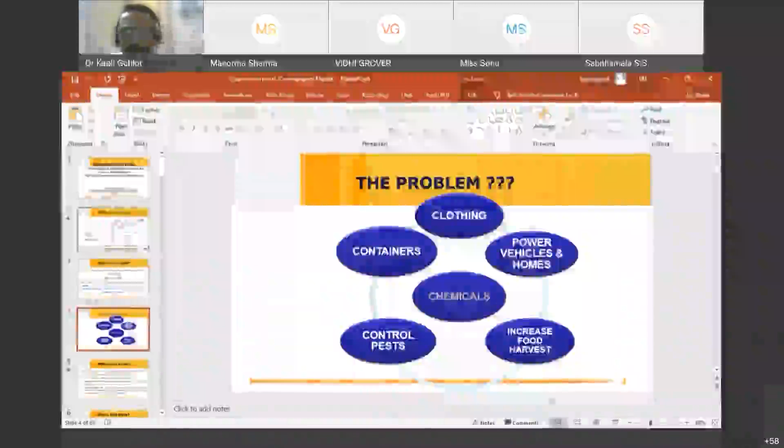Sir, actually, where should I start from? Let me start again. Due to some technical glitch, sir, it first slide. Okay, okay.

So I'll be talking about bioremediation technique for the solid waste management. So first of all, I'm going to define what is the solid waste.

In general, when we define solid waste, solid waste is considered as any unwanted or useless solid material which is generated from human activities in residential, industrial, or commercial areas. So any solid waste generated from these areas can generally be included in the solid waste.

And these wastes, according to their origin, according to their contents, and according to the kind of hazard they impose, can be categorized into three categories. Depending upon the origin, they can be classified as domestic solid waste, industrial solid waste, commercial solid waste, the solid waste generated by construction activity, and institutional solid waste.

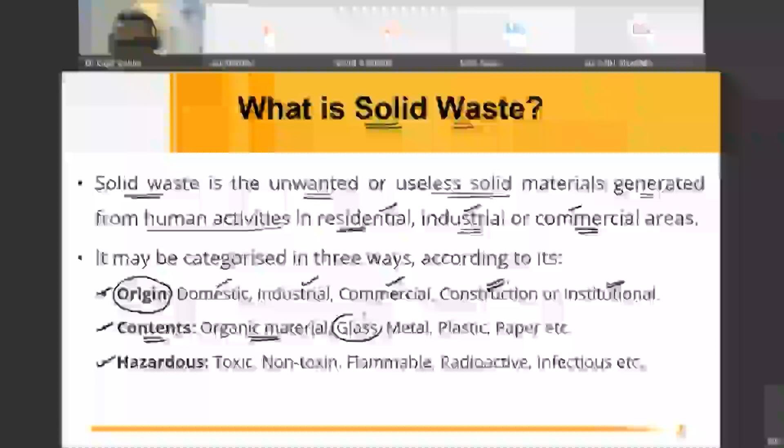Then, depending upon the content, we can classify solid waste into organic materials - the solid waste which contains carbon content and is organic in nature. That is one kind of solid waste. Then there is waste generated by glass, scrap metal, then plastic - this is one of the very important cases because we are dealing with a lot of problems - the waste generated in the form of plastic, and then paper. So depending upon the content present, this is another classification of solid waste.

Then on the basis of the nature of hazard, solid waste can be classified as toxic waste - waste which imposes directly toxic effect on human beings, animals or plants. Then there can be non-toxic solid waste, which does not directly affect living beings. Then we have flammable solid waste, radioactive solid waste, as well as infectious solid waste. So these are the major categories as far as solid waste is concerned.

Now, when we define solid waste scientifically, the first scientific definition was given in 1976 under the Resource Conservation and Recovery Act, RCRA, under section 1004(27).

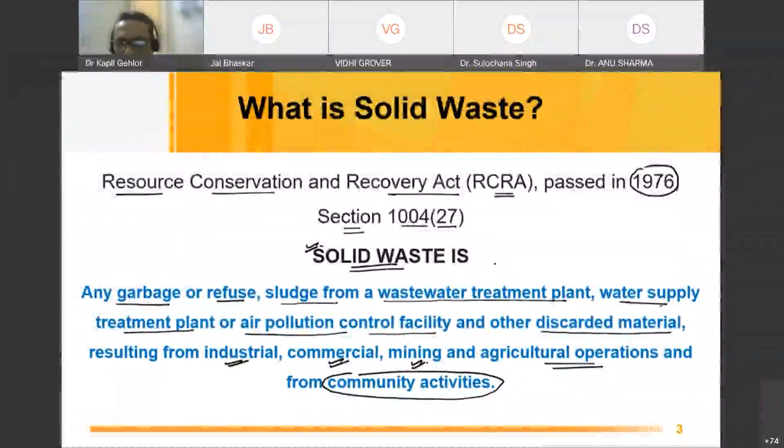Then, as you know, in day-to-day life we use chemicals for our clothing needs. And these clothes, after a certain duration of use, are accumulated as solid waste.

We require fuel for powering our vehicles. Now, extraction of fuel and its refining generates a lot of solid waste. Besides that, to power our homes, one of the major sources of electricity is coal-based electric stations, and combustion of coal in such areas obviously produces quite a lot of ash and other forms of fly ash.

Then, in order to increase our food harvest and control pests, we use a number of different artificial fertilizers, pesticides, herbicides, and when they are mixed with soil, they generate another kind of waste.

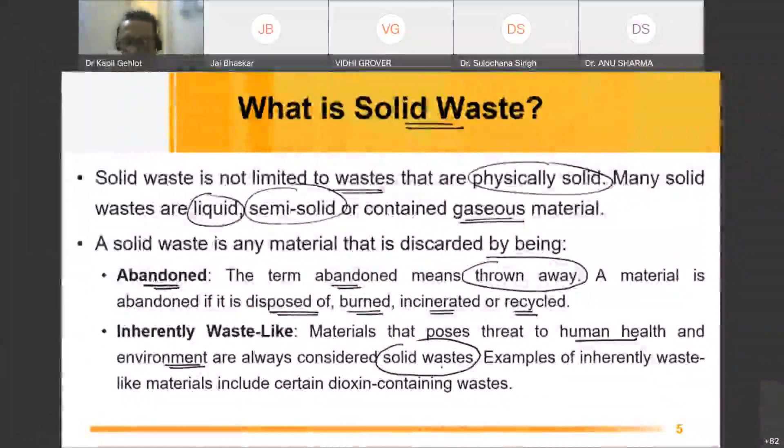These include certain polyaromatic hydrocarbons, dioxins, etc., which are also toxic to us.

Then one major solid waste is discarded military munitions. Basically, military munitions include all the military weapons, ammunitions, equipments, and all the components used to produce these, which are used by armed forces for national defense and security.

When these weapons or articles, which are either unused or defective, they also generate solid waste besides the material which has been used. So all those ammunitions which are abandoned, even which are treated prior to disposal, which are rendered non-recyclable or non-usable through deterioration, which are declared as waste by authorized military officials, then even the used munitions also generate solid waste. So a large amount of solid waste is also generated during defense activities, whether due to war or practice sessions.

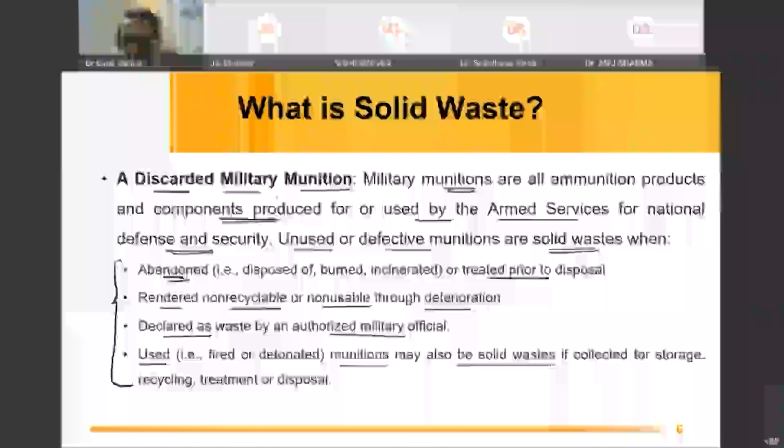Then there are certain solid wastes which can be recycled in certain ways. These include all those materials which can be recycled, which can be used or reused as an ingredient in any process, or can be reclaimed or used in certain ways. All these things, if we find those which can be recycled or reused, depending upon certain conditions, they can be excluded also.

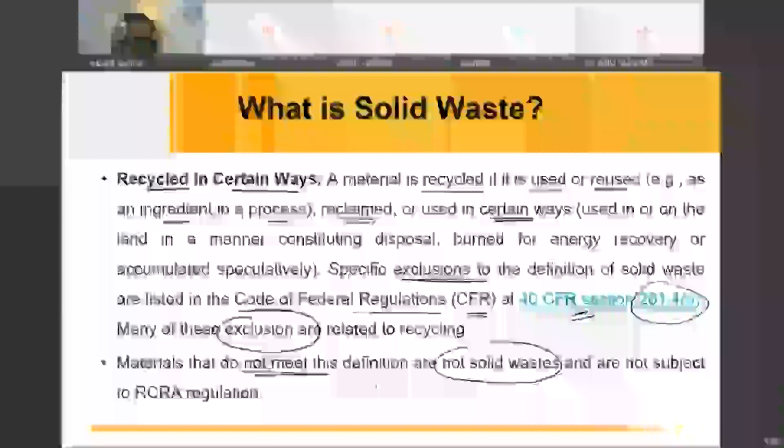And all these conditions have been defined in the Code of Federal Regulations, CFR, at 40 CFR section 261(4)(a). Many materials which can be properly reused, properly reclaimed, or recycled have been excluded from solid waste, and these things have been defined under this section. So anything which does not meet all these conditions is not solid waste, according to RCRA regulations. That is how technically solid waste has been defined.

Now, if we consider the extent of the problem solid waste is generating, globally, simply in terms of MSW, municipal solid waste, currently global municipal solid waste generation levels are around 1.3 billion tons per year. So all over the world, we are generating 1.3 billion tons of municipal solid waste every year. And this is expected to increase to approximately 2.2 billion tons per year by 2025. So it poses a serious issue.

If we consider India, we are generating around 0.1 million tons of municipal solid waste every day, which is approximately 36.5 million tons annually. And if we calculate per capita waste generation in major Indian cities, it ranges from 0.2 to 0.6 kilogram per day.

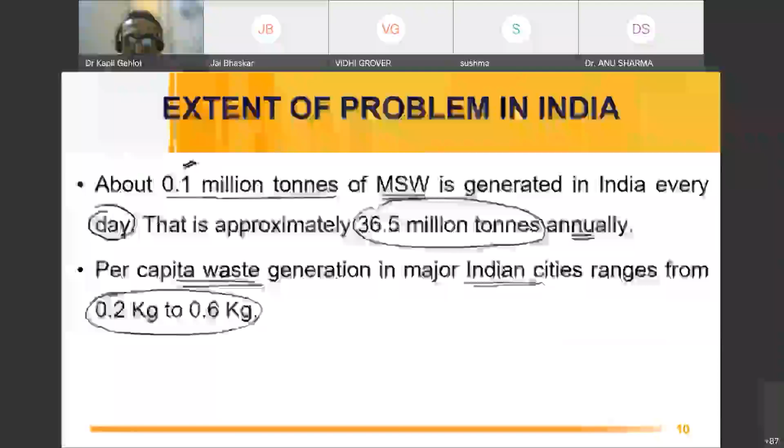It has been found that solid waste generation in India has increased with its demographic growth. We are having an ever-increasing population, and with the increase in population, the number of articles we are using and the requirements are increasing. So demographic growth has an exponential effect as far as solid waste is concerned. Even urbanization is playing a major role.

As our guest had already told us, if we consider the living standards in old times in our country, we used to generate quite a less amount of waste in our day-to-day activities. But with increased urbanization, the extent of solid waste we are generating has been increasing. Then industrialization is also contributing. Then one major source is our increasing need for energy. There can be numerous factors; these are a few of them, which I had mentioned.

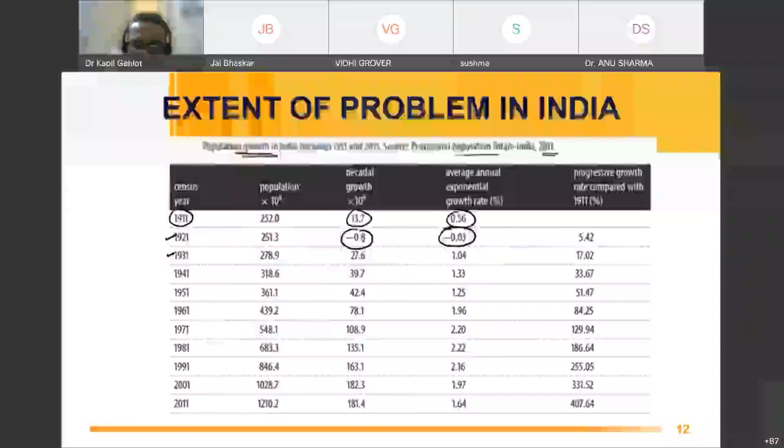As far as the progressive growth is concerned, with reference to 1911, it is always increasing. By 2011, the progressive growth with reference to 1911 was around 407.64%. So we are having an ever increasing population.

How does this population affect the solid waste in our country? It has been found that with the growth of mega cities in India, due to globalization of economy, culture, and technology, there has been an exponential growth in the solid waste around the country.

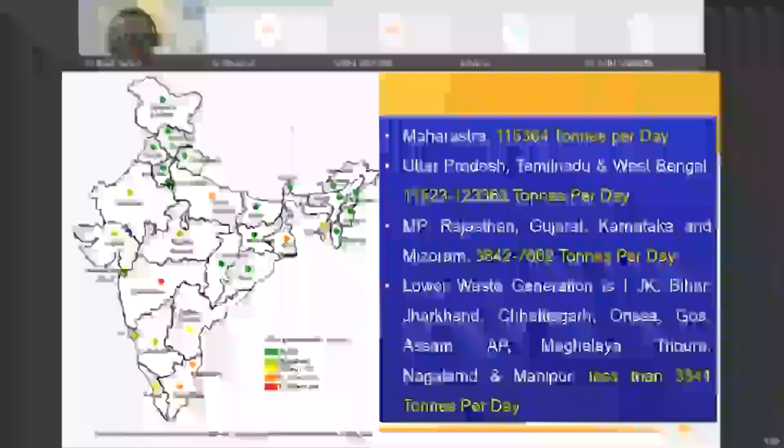Here we have divided the different states according to the metric ton of municipal solid waste generated over there. At the top we have Maharashtra, which generates the maximum amount of waste. The next states are UP, Tamil Nadu, and West Bengal, where the amount of waste generated ranges from 11,523 to 1,23,363 tons per day.

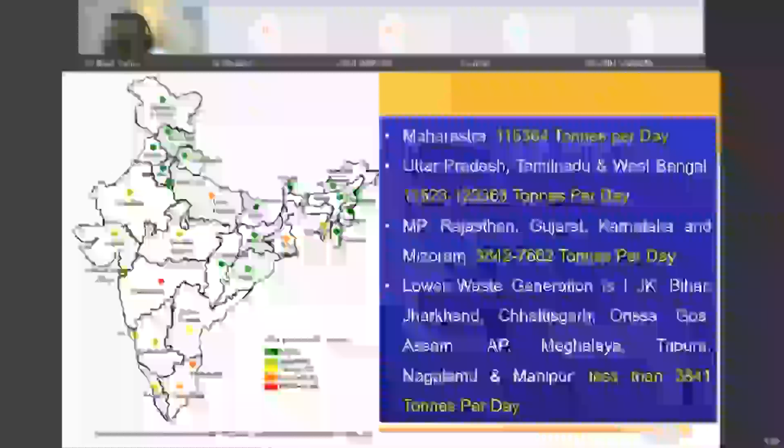MP, Rajasthan, Gujarat, Karnataka, and Mizoram stand at the third position, ranging from 3,842 to 7,662 tons per day. The rest of the states can be considered as lower waste generation states: Jammu and Kashmir, Bihar, Jharkhand, Chhattisgarh, Odisha, Goa. All these states have less than 3,841 tons per day of waste generated.

This is the altogether scenario as far as our country is concerned, regarding municipal solid waste. Now the general composition of municipal solid waste in India has been found to have a local economic impact as far as this composition is concerned. As we move towards the high income group...

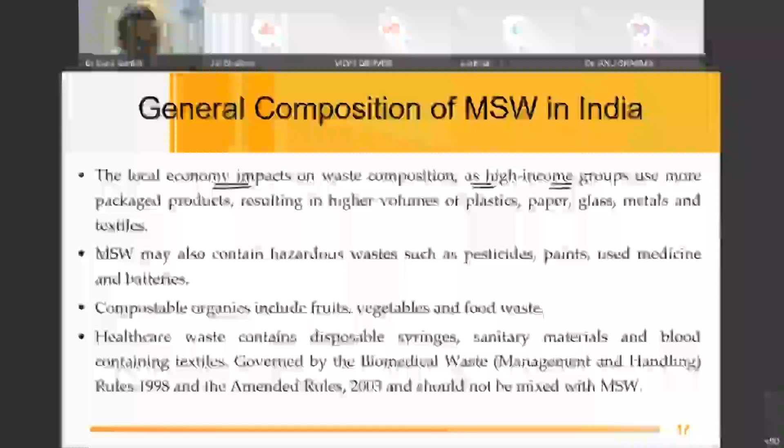So as we move towards high income groups, they tend to use more packaged products, which results in higher volumes of plastics, paper, glass, metals, as well as textiles. The municipal solid waste also contains some hazardous waste such as pesticides, paints, used medicine, as well as batteries. Then we also have some compostable organic waste, which includes the waste generated by fruits, vegetables, and other food wastes.

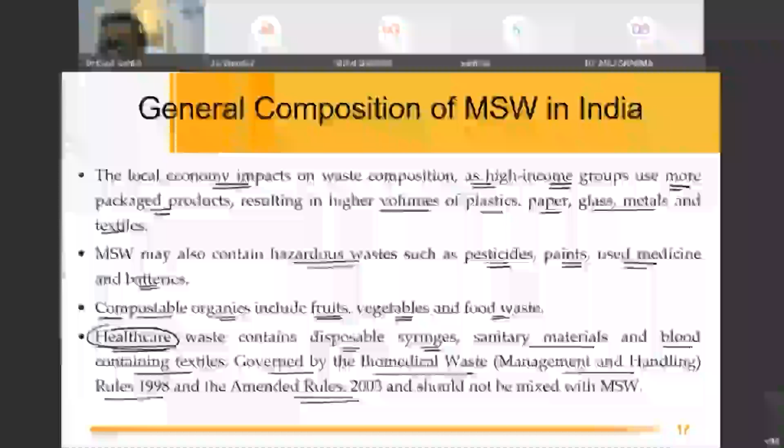Then there is serious solid waste which is generated from the healthcare system: disposable syringes, sanitary materials, blood-containing textiles. All this waste generated from the healthcare system is governed by the Biomedical Waste Management and Handling Rules 1998, which were amended later in 2003. Truly speaking, these should not be mixed with municipal solid waste because they can cause serious issues of infections. So that is the basic composition as far as the waste is concerned.

In total, if we consider the average percentage of waste composition of municipal solid waste in Indian metro cities, we are generating near about 41% compostable solid waste, 40% inert solid waste, then the rest is 6% paper, 4% plastic, 2% glass, 2% metal, 4% textile, and 1% leather.

Now, out of all this solid waste, the two important areas of concern are the inert solid waste and the plastic solid waste, because as far as the other solid waste is concerned, they can either be recycled or, since they are compostable, used in other ways. So these are two important areas of concern, and together they make near about 44% of it. And as far as plastic is concerned, this is ever growing, so we need to think about it.

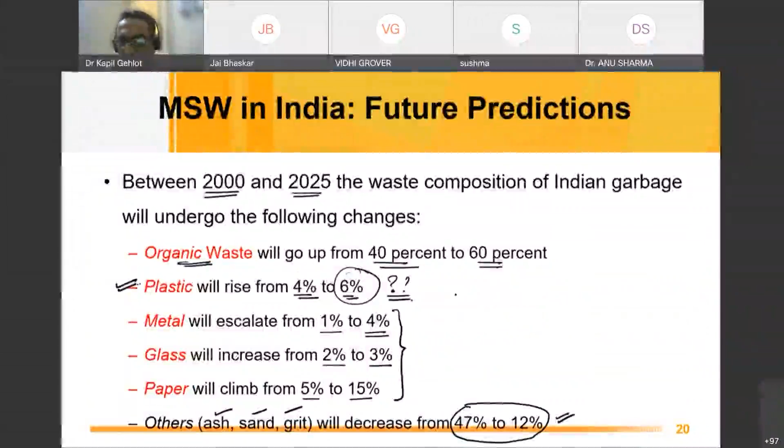Paper from 5% to 15% — these are not so important because they can be easily recycled. Then as far as other waste, ash, sand, and grit is concerned, it is going to decrease. So this is a good figure as far as solid waste is concerned, but we need to think about this also, because plastic waste is ever growing in our country.

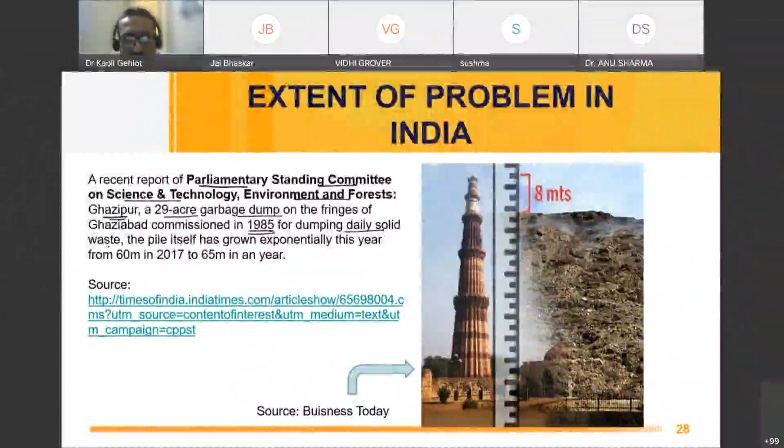As far as this Ghazipur solid waste dump yard is concerned, there was a recent report of the Parliamentary Standing Committee of Science and Technology, Environment and Forest. Ghazipur basically covers 29 acres of garbage dump, and this was commissioned in 1985 for dumping daily solid waste. The pile itself has grown exponentially, from 60 meters in 2017 to 65 meters in a year.

And I have taken a very interesting comparison over here. This is the height of the Ghazipur dump yard, the dump which is created over there, and this is the height of the Qutub Minar in Delhi. It is only 8 meters short compared to the height of the Qutub Minar. This picture was taken around 2018 and 19, so this gap might have reduced by now. So this is causing a serious problem, and these kinds of dump yards have been created in all the major cities of India.

Due to this there are a lot of breathing troubles, and students move to schools wearing masks even before the corona incident. You might remember the incident during the cricket match at Firozshah Kotla when some Sri Lankan players used masks to avoid the direct effect of the smog. There were also other sports events carried out in Delhi during winter where participants used masks to avoid direct contact with the smoke.

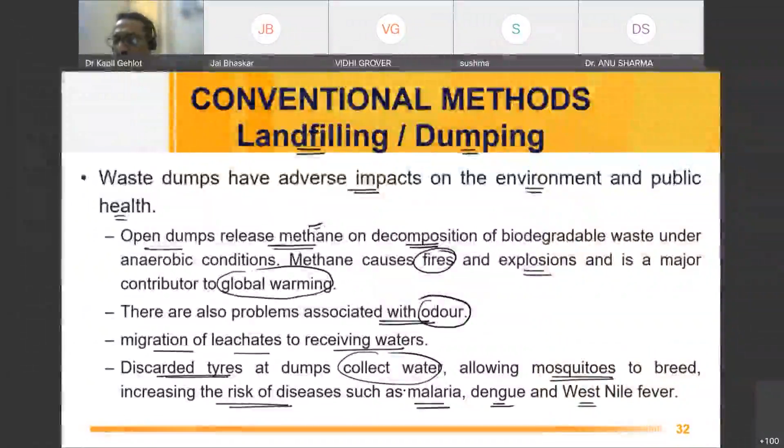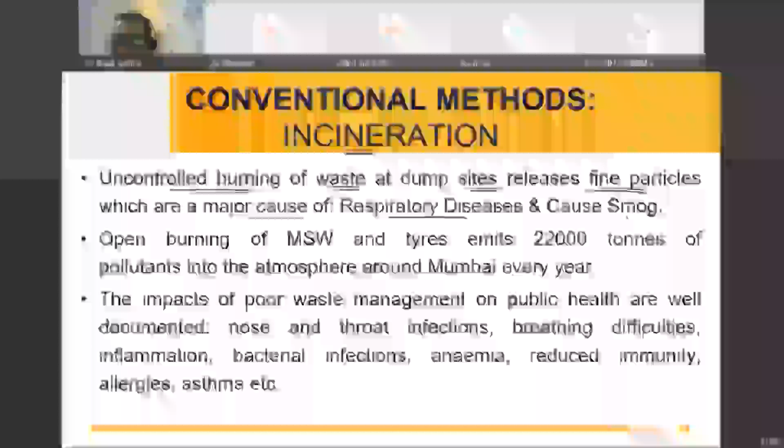Then another method we discussed was incineration. Incineration is basically uncontrolled burning of waste at dumping sites, and it releases certain fine particles which are a major cause of respiratory diseases and also cause smog. Open burning of municipal solid waste and tires emits near about 22,000 tons of pollutants into the atmosphere in Mumbai every year. Then what can be the amount if we consider the whole country?

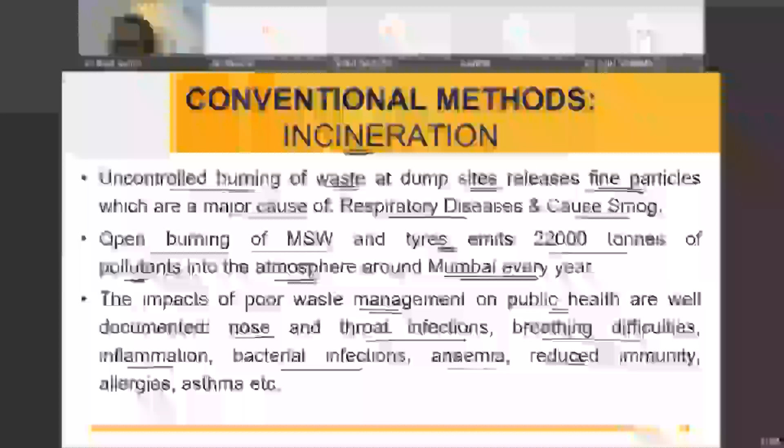As far as the impact of poor waste management on public health is concerned, these are well documented and it causes nose and throat infections, breathing difficulties, inflammation, bacterial infection, anemia, reduced immunity, and other allergies and asthma. So besides coronavirus, throat infection and lung infection can also be caused by this incineration process used for treating solid waste. We seriously need to think about it.

So we need to increase these practices—composting and 3Rs—and reduce open dumping, landfilling, and incineration as far as solid waste is concerned.

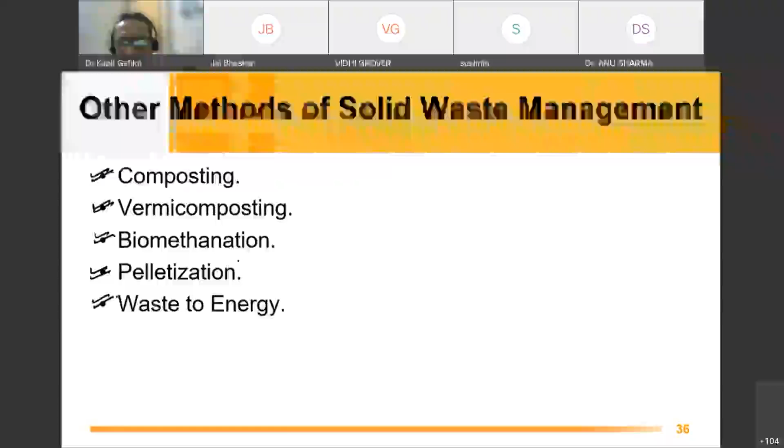These are a few good practices which can be used, but here I will be emphasizing on another practice known as bioremediation, which we'll be discussing later on.

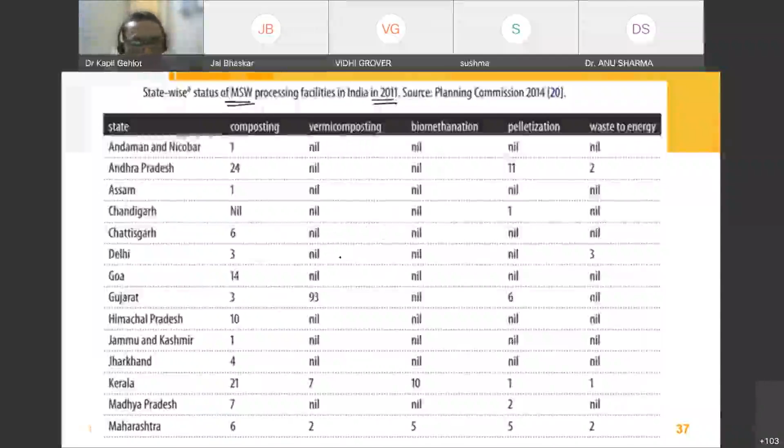Now, this is the state-wise scenario of municipal solid waste processing facilities in India—how many composting, vermicomposting, biomethanation, pelletization, and waste-to-energy plants have been established in various states. You will find that in most of the table, the value is nil. We need to think seriously about it, because these are comparatively easy methods for treatment of solid waste, but we are not giving very serious thought to treating such waste.

Overall, in India there are 279 composting plants, 138 vermicomposting plants, 172 biomethanation plants, only 29 pelletization plants, and only 8 plants where waste has been used for generating energy.

As far as pelletization plants are concerned, we need to increase them because we have a large amount of inert waste which cannot be treated by any other method. We also need to increase waste-to-energy production. This can be a very good area of research where we can develop methods so that waste can be used as a source of energy.

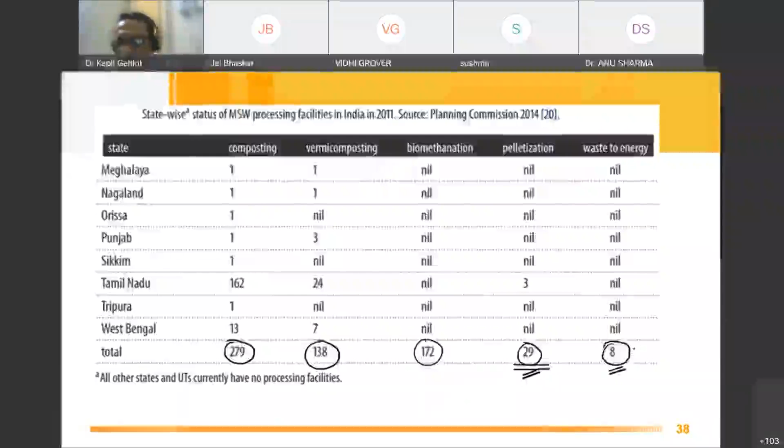As far as India is concerned, out of the total municipal waste collected, on an average 94% of it is dumped on land and only 5% is composted. We need to seriously think about increasing these facilities in different states so that solid waste can be treated in a better manner.

Now I will emphasize another method known as bioremediation. Bioremediation is basically a multidisciplinary approach in which we use either microorganisms or plants. When we use plants, it is also known as phytoremediation. The enzymes from these microorganisms or plants are used to detoxify the pollutants, or for treating the solid waste in our case.

As far as this technique is concerned, it involves basically 4 methods. The first step in the method is stimulation.

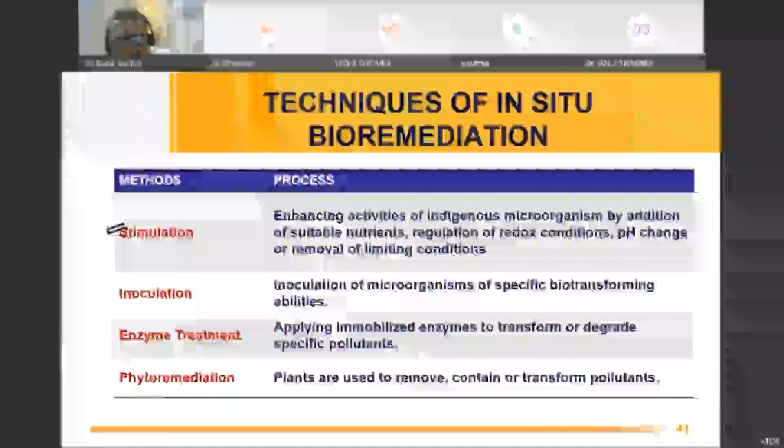As far as stimulation is concerned, we need to enhance the activities of the microorganisms present in situ, that is at the place itself, by addition of suitable nutrients. We need to regulate the redox condition at that particular place, regulate the pH, and remove all the limiting conditions over there so that microbial growth can take place, and once the microbial growth starts, the bioremediation process starts automatically.

So as far as our role is concerned, we are simply playing the role of a catalyst in the process. The microorganisms are already present in situ; we are simply providing suitable, optimum conditions by providing nutrients and removing conditions causing limitation for growth, by regulating redox or pH, so that microbial growth can take place, and once that happens, bioremediation starts automatically.

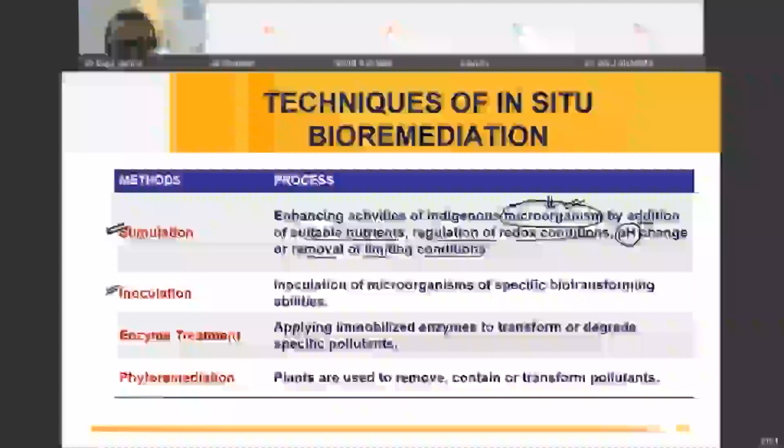And if the condition is that microbes are not present over there, then we can inoculate specific types of microbes which are suitable under the given geographical conditions and which have biotransforming abilities. So we can carry out the inoculation of microbes also.

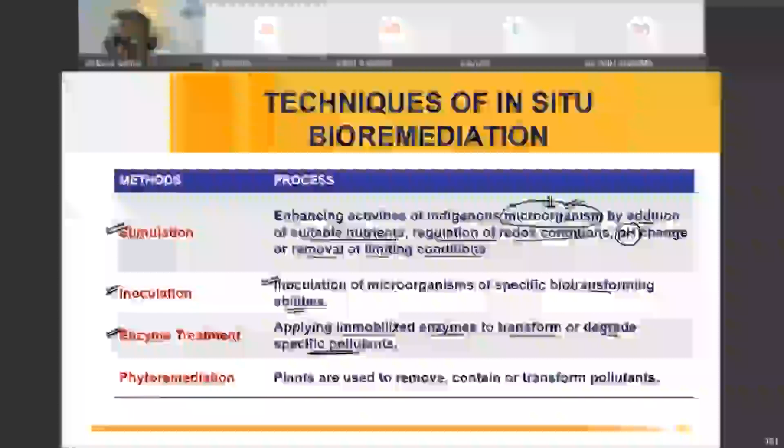Or we can carry out this process by direct enzyme treatment, that is, applying immobilized enzymes to transform or degrade specific pollutants. This kind of process has now been used in adjoining areas of Delhi to treat paddy crop waste, so that the waste farmers used to burn after harvest can instead be biodecomposed. So this enzyme treatment technique has been used over there.

Then we can use phytoremediation, that is, we need to grow suitable plants at that particular area which can be used to remove, contain, or transform the pollutants present at that site. So these are the four methods basically used in the bioremediation technique.

Now this technique has been successfully used in various classes of compounds. It has been used in treatment of gasoline. If there is leakage of any fossil fuel like petrol, diesel, kerosene, etc., then contaminated groundwater or even contaminated soil can be treated by this bioremediation technique. Contamination by kerosene, pentachlorophenol, and other oil contaminants can also be treated using these bioremediation techniques.

We can also treat compounds like naphthalene and phenanthrene, which are polyaromatic hydrocarbons and very toxic, and other chlorinated hydrocarbons in contaminated groundwater, using this bioremediation technique. This technique can also be used for treatment of chlorinated solvents, chlorinated aromatic compounds, chlorophenols, pesticides, explosives, and also radioactive nuclides and anions. Inorganic anions can also be treated using this bioremediation technique.

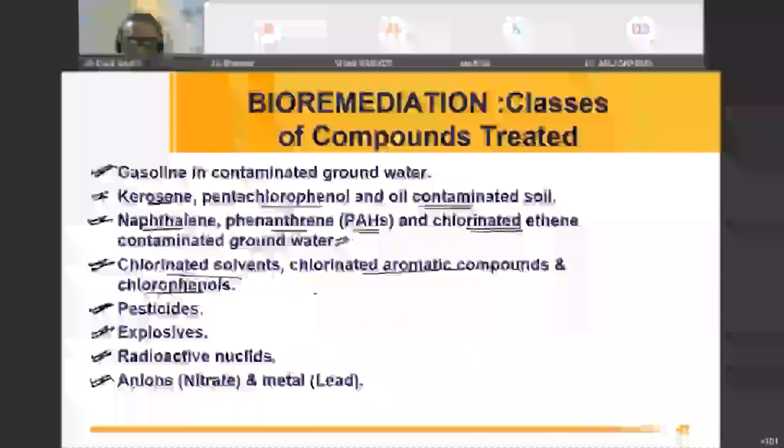Although by now there are few compounds which have been bioremediated, research is still going on to identify organisms so that we can develop methods capable of degrading other various types of pollutants. This technique, bioremediation, remains an attractive pollution abatement technology. Many techniques have been developed, but I propose that this technique can also be used for solid waste management, particularly in mining areas.

In Barmer, the temperature is quite high, and it shows large variation in a day also, particularly in summers. Throughout the year, we have a maximum temperature of around 48 degrees Celsius in summer, and it drops to 2 degrees Celsius during winters. We have scanty rainfall in Barmer, with average rainfall around 268 millimeters per year.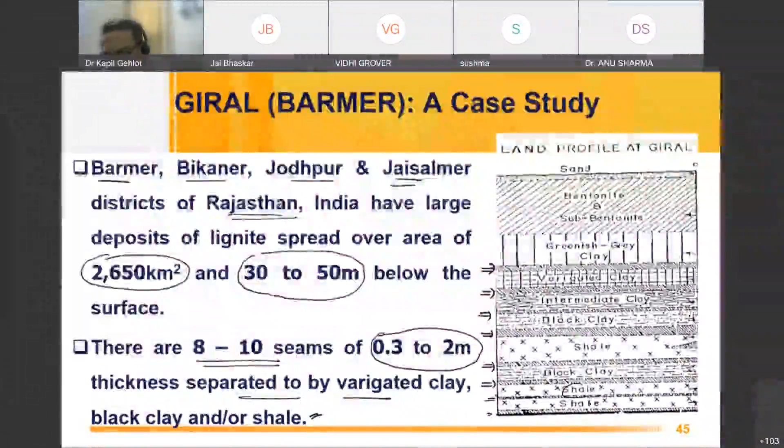So open cast mining has been observed over here. This is the complete strata of the land present in that area. These are the coal layers which are separated by shale, black clay, intermediate clay, variegated clay, and greenish clay. Besides that, the top layer is obviously sand. After sand, in this region, we have bentonite and subbentonite type clay, and then other types of clay and intermittent layers of lignite.

Due to the open cast mining, this was the area where the open cast mining was carried out. This was the first pit, and the first and second pit in continuation, where the open cast mining was carried out. When the first pit was dug, a huge dump yard was created there.

As far as the land profiling is concerned, due to digging, the profile of the sand has been reversed as compared to the natural sand that was present there. Due to high sulfur content, particularly in the rainy season, there were some exothermic reactions going on.

Just after the rain, due to the presence of coal in that area and certain exothermic reactions, there were intermittent firings which took place spontaneously. Due to that reaction, there was deposition of sulfur because there was very high sulfur content in the variegated clay and black clay. After the combustion, there were deposits of sulfur like this - yellow sulfur gets deposited on the surface.

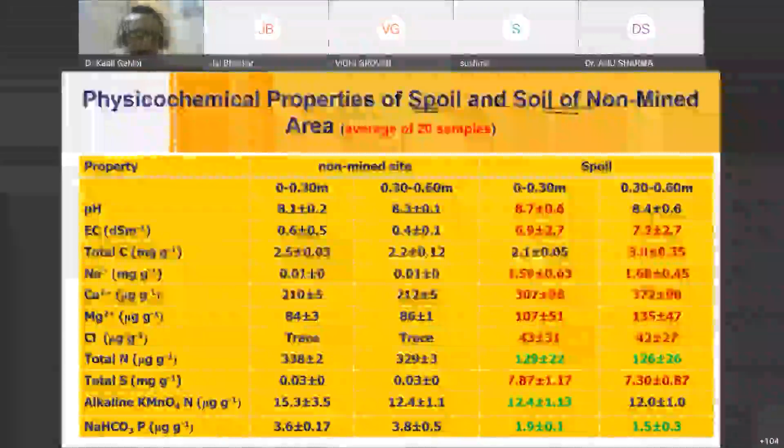So that was the initial condition when we reached that particular site, and these were the conditions which were waiting for us. So we carried out the physicochemical analysis of the spoil as well as the soil of non-mined areas for comparison. All this data is basically the average of 20 samples. These are the various parameters which were measured, and I'm not going to discuss all these parameters.

But you will find that in most cases, if we consider electroconductivity, total carbon, sodium, calcium, magnesium, and chloride - these were all comparatively high in content as compared to normal soil. But the major nutrient required for plant growth or for recycling the sites, that is nitrogen, was very low as compared to normal soil.

Alkaline KMnO4 nitrogen basically shows the nitrogen which is available for the plant directly. That content was not very good, although this content is obviously very low in sandy areas, but it was less compared to the non-mined sites. Then phosphorus content, the available phosphorus content was very low at the mined soil areas. Even the trace metal ion and potassium content were not matching - they were not showing any favorable condition for the kind of activity we needed to carry out.

And there was negligible enzymatic activity in the soil - hardly any activity in that particular soil. So this was the problem posed to us. We needed to rehabilitate that area, and we decided to use the phytoremediation technique in order to rehabilitate it. Around 15 hectares of land was given to us after backfilling and dumping that we needed to reclaim.

As far as the dump yard was concerned, the condition there was quite rigorous because the pH was only 4.8. Because of certain exothermic reactions, there was production of acid there, and sodium content was very high. In the mine spoil area, we had another kind of problem - the pH was very high and the sodium content was low. So even at different sites, we had different kinds of problems.

So in total, we had low available nitrogen and phosphorus, which are important for plants, and very low enzymatic activity - that is dehydrogenase as well as phosphatase activity - which provides the environment for plant growth. And there was no nitrification because nitrogen is very important for plant growth, and there was hardly any nitrification at these sites.

So what we did, we laid certain layers of normal soil over that spoiled area on the dump yard as well as the backfilled sites. We created three types of rounds. On the first, we laid 12 inches of normal soil. On the second, 24 inches, and on the third, 36 inches of normal soil. In this soil, we mixed a certain amount of muram, which is a kind of soil with comparatively high alkaline activity. We laid this muram along with the normal soil so that when rain or water flows downwards through it, it can neutralize the acid generated due to the exothermic reaction at the site.

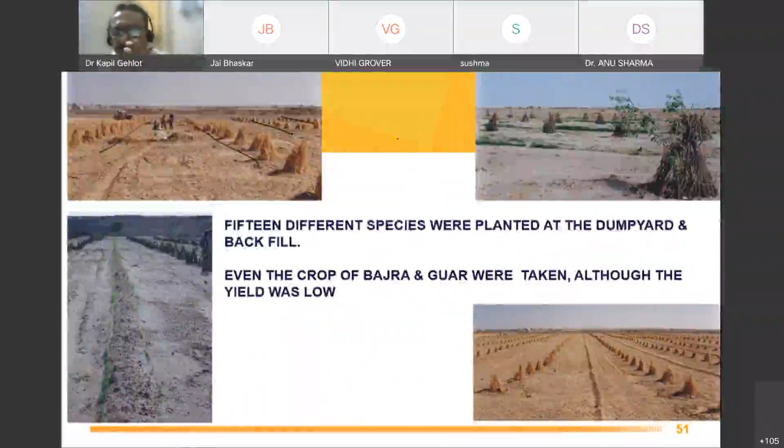We planted 15 different local plant species which were available at that particular site, and we also grew certain grass there. These are the various plant species which were planted over there. All the plant saplings were prepared at the site itself — we created a nursery there and they were planted. Between the rows of plants, we also planted grass by spreading grass seeds over the area.

This activity, bioremediation, basically involves enhancing microbial activity. The soil present there was hardly having any kind of microbial or enzymatic activity, so we provided optimum conditions so that microbial activity could start over there.

After carrying out all these treatments, we found that the area with around 3 feet, that is 36 inches of soil, provided very good results. At that site, we even took the crop of bajra and guar. Although the yields were low, the results were encouraging. So these were the various treatments carried out over there.

These were the 15 plant species planted over there for the phytoremediation of that particular site. Then after 2 years, we again carried out certain analysis to find the effect of phytoremediation.

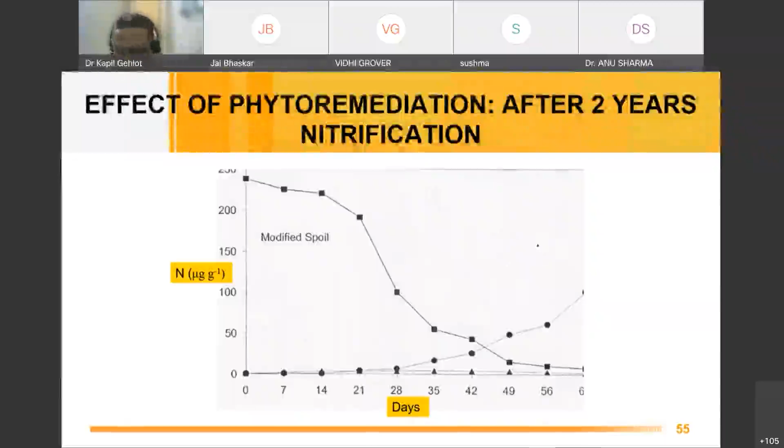So in the non-mined soil, this kind of biological activity is present. But as far as the lignite mine spoil was concerned, there was hardly any nitrification, even after 2 years. But on the modified spoil, where we carried out our modification, we got very good results — there was a decrease in ammonia concentration with an increase in nitrate content, which shows that microbial activity is enhancing over there. And once microbial activity enhances, rehabilitation takes place naturally. This was a very encouraging result which we got after 2 years.

We then carried out the complete physiochemical parameter analysis after 2 years, and the results were quite in range. The results were very interesting, and we found that the plant growth taking place at that site was very encouraging, and the complete process was carried out successfully.

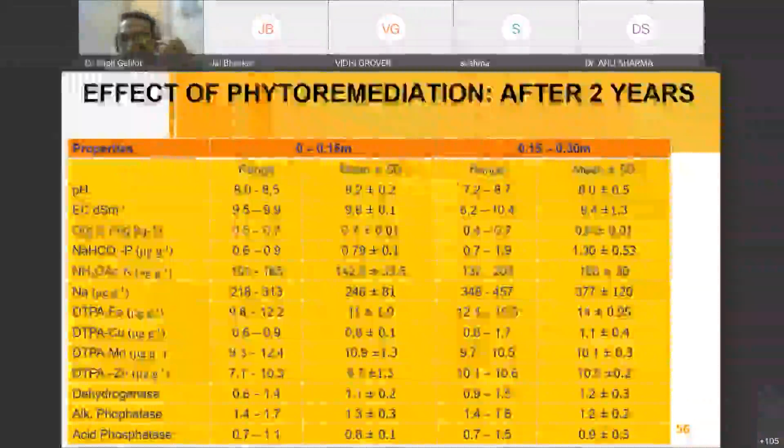We started this project around the year 2009. The complete initial process took around 1 year, and after plantation of the plants, after 2 years, these were the results which we got.

Even the grazing animals had started visiting over there, which shows that the land can now be reused, and we got very encouraging results at that particular site. The plants are growing and biological activity is at full swing. So these were the results which we obtained.

So this was the successful project which was carried out at the Giral site. Now, as far as this technique is concerned, what are the advantages of this bioremediation or phytoremediation technique?

First of all, this technique is very economical compared to other traditional methods. At the site where we carried out remediation on 15-hectare land, the cost of the complete remediation process was around 2.5% of the value of the lignite excavated from that site. So as far as cost is concerned, this is very low for any purpose, because when we consider sustainable development, this cost can be considered very low.

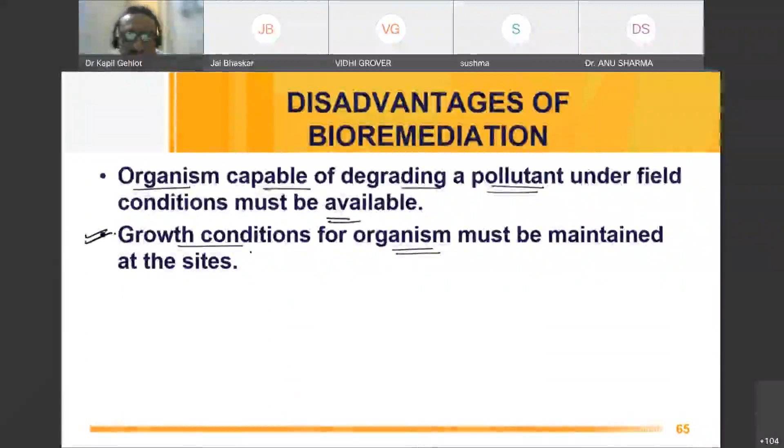This complete work was carried out under the guidance of hydrologist Dr. K.D. Sharma, along with senior research fellow Raman Pandey; they were basically hydrologists and engineers. Then Dr. Praveen Kumar, who was a soil scientist, with whom I was associated, and then Dr. Suresh Kumar, who was the ecologist, and Dushyant Gehlot, who was the senior research fellow under him.

This complete project was funded by Rajasthan State Mines and Minerals Limited, Jaipur, and the rehabilitation work was successfully carried out at that particular site. Due to this rehabilitation work, the sanction was granted for lignite mine excavation from that area, and successfully lignite mine excavation is going on there.

So if you have any queries, you can ask. I hope I was able to explain it. Is there any queries?

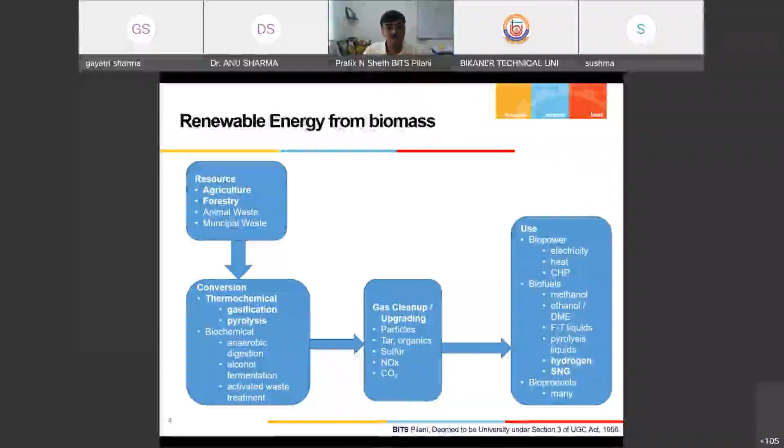And based on the treatment or upgradation, what you can get is different kinds of fuel and biopower. Either you can use it for electricity, heat, or combined heat and power, or for biofuels. One can go from syngas to methanol, ethanol, dimethyl ether, Fischer-Tropsch liquids, hydrogen, or synthesis natural gas, or many other bioproducts or biochemicals. One can generate platform chemicals.

So in general, if I take lignocellulosic biomass and apply thermochemical conversion, we can get different technologies and different products. So if I go for gasification, I'm going to get syngas, which is called synthesis gas or producer gas.

Lignocellulosic biomass is low cost and greatly available, with renewable characteristics. The bio oil or biopolyols we get can undergo hydroprocessing to get liquid fuel, or the syngas can undergo FT synthesis, MEOH, or water gas shift reaction.

So if I'm going for the first two, I'm going to get liquid products, or if I'm going for water gas shift, biohydrogen production we can have. Or if I'm going for a certain type of product, another route one can take.

Which one you should follow, how you can do it - that depends upon the type of biomass, the kind of technology, and what the end application is. But these are all technologically feasible routes that are possible. One of the best routes, if I'm focusing purely on hydrogen, is this particular route.

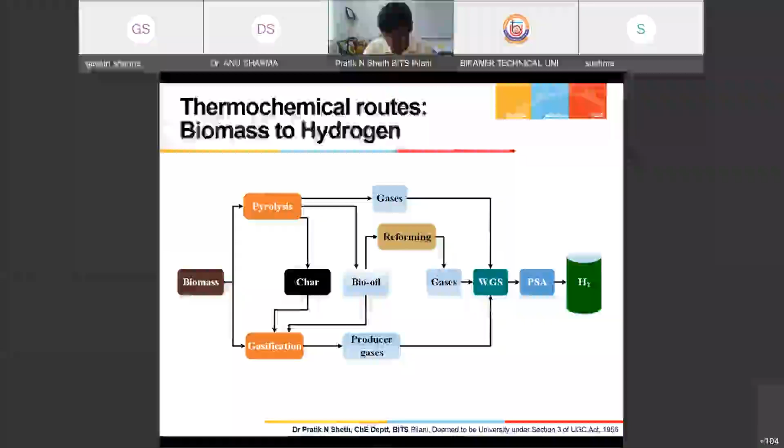So the biomass pyrolysis - although I already conveyed what are the different products from pyrolysis, but what exactly is pyrolysis? That is thermal decomposition of biomass. Biomass, as all of you with a chemistry background are aware, is basically a mixture of three compounds: cellulose, hemicellulose, and lignin. Lignin acts as a binding agent and gives strength to the biomass.

So when we thermally heat in the absence of oxygen - if we provide oxygen, it will simply be combustion because it's a fuel - but if I remove the oxygen part, it is not going to combust. What is happening is a destructive distillation of that biomass, a thermal decomposition. When it thermally decomposes, it releases volatiles, and those volatiles are basically vapors and gaseous mixtures. This generally occurs at a temperature range of 350 to 700 degrees centigrade, and with that, biomass breaks down to condensable vapor and non-condensable gases.

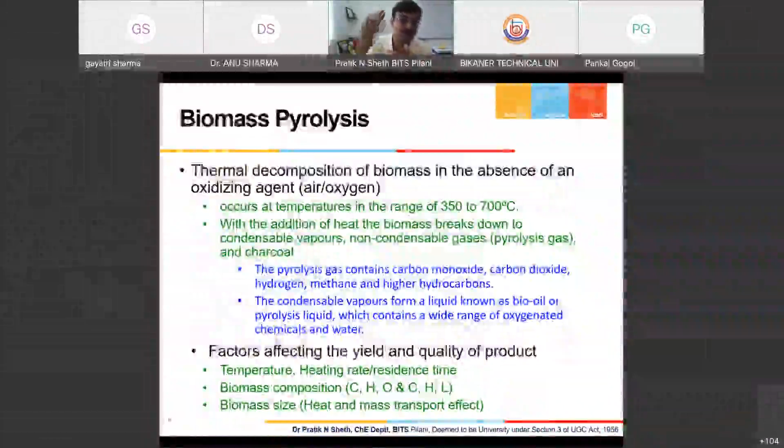So I mentioned two things, vapors and gases. I use the word vapor for the condensable gases, and there are certain non-condensable permanent gases also generated, because when biomass breaks down, it releases components from cellulose, which is a long chain polymer of CHO. When it decomposes, sometimes it decomposes all the way down to permanent gases only - carbon monoxide, carbon dioxide, hydrogen, or methane - and those are not going to condense. But what is going to condense are certain carbon chains of 8 or 10, or maybe 15, 17, or even higher, and with a condenser those would become condensable vapors - that is basically the bio oil.

So the pyrolysis gas contains, as I mentioned, CO2, H2, CH4, and certain higher hydrocarbons. And condensable vapors form a liquid known as bio oil or pyrolysis liquid, which contains a wide range of oxygenated chemicals and water. It includes many acids as well, and many alcohols, so it would be a mixture.

So unless you use some catalysis to direct a particular kind of product, biochemical production itself is a very difficult task. Rather, if you want to go for the fuel, it's perfectly fine, because fuel is always a blend, like even gasoline or things, it is not a single chemical, right? It's a blend of things in a certain range of hydrocarbon.

Fine, so this is the process and the product. So what are the factors that affect the yield and the quality? There are two things: how much and how good. So the temperature is of course one thing, that is 350, 700, whatever we want to do. And the heating rate, how fast the heating is there, or if it is a different kind of reactor, then the residence time.

So I already discussed the biomass composition, that is cellulose, hemicellulose, and lignin. But another thing is, if I am doing the elemental analysis, it suggests that there is carbon, hydrogen, and oxygen. We call it CHNS analysis, and the leftover rest amount is oxygen, right? So that's how we get that. Basically, we know that it would be approximately 6-8% hydrogen in the biomass. So when I am producing hydrogen from that, 100 grams will not give more than 6 grams of hydrogen, because it is not there within that. You can't get more than that, right?

So that's what we look for if I'm looking for hydrogen, pure hydrogen, what would be the yield I am going to get out of it, right? Even if I am going for pyrolysis, it would be even smaller, a very small amount would be there.

Now, the quality depends on how pure the compound is, or how good the compound is in terms of certain performance parameters. That's what we can say.

The third thing is the biomass size. So if I'm going for larger size particles, then there's the heat and mass transport effect. Because whenever I'm choosing a biomass greater than 1 millimeter in size, the heat has to penetrate inside, through convection or conduction, and within the pores, through convection the heat would be transported inside. Of course, through radiation from your heating material to this thing. And so when the heat is getting transported inside, the volatiles will be released, and those volatiles will pass through the channels and the porous material and come out.

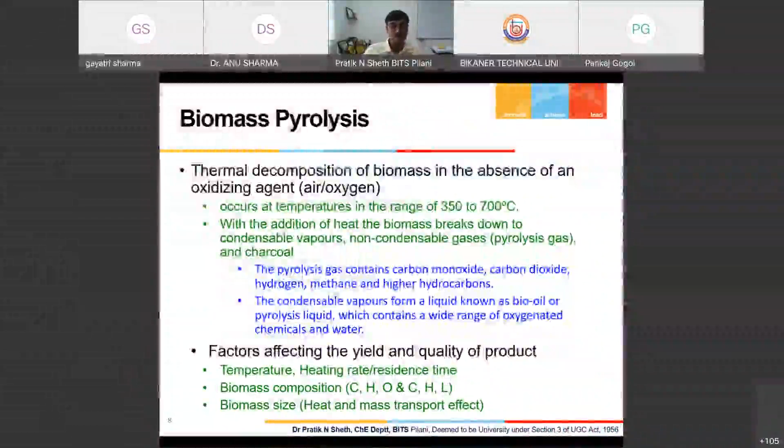So that is what the heat and mass transport effects are basically. It is not simple, but if you have a size lesser than 1 mm, we can say that it is fairly kinetically controlled, and it immediately flashes into the volatiles, and whatever remains would be the char. The time factor would not be there. So the biomass size depends a lot. But again, if you want to decrease the size, you have to put resources or energy in terms of grinding or size reduction. So that's what the point is all about.

So what happens because of that? If you have a higher biomass size, then the charcoal production will be more, because certain volatiles will not release till the surface, or they may condense over again, and coke formation would be there. So that's what happens sometimes.

Now the next is the type of reactor. What are the different kinds of reactors one can have? It could be a fixed bed reactor, or a fluidized bed reactor, or circulating fluid bed, or vacuum pyrolysis.

What happens is, if I take a batch reactor kind of thing, which is a fixed bed kind of reactor, you heat it and you get all three products. Continuously your vapors and condensable gases come out. But what about the charcoal, which is inside? Once your conversion is over, you need to go batch wise, take it out, put another batch in, and run it again.

But rather than that, if I go for a continuous basis, either a circulating fluid bed or a fluidized bed kind of system also can be generated, where fine particles are there. They are in a fluidized bed and continuously converted into charcoal and bio-oil or non-condensable vapors, and those are separated through a cyclone separator, with the biochar separated out. That's how that kind of system would be.

Now another thing is vacuum pyrolysis. This is based on the kind of operating conditions you maintain. One option is you maintain nitrogen blanketing over the reactor, or another thing is you simply create a small vacuum draft inside it, so whatever vapors are generated are carried away outside through a blower. Upon condensation you can also do this at different temperatures, so continuous separation is also possible. That's what vacuum pyrolysis is.

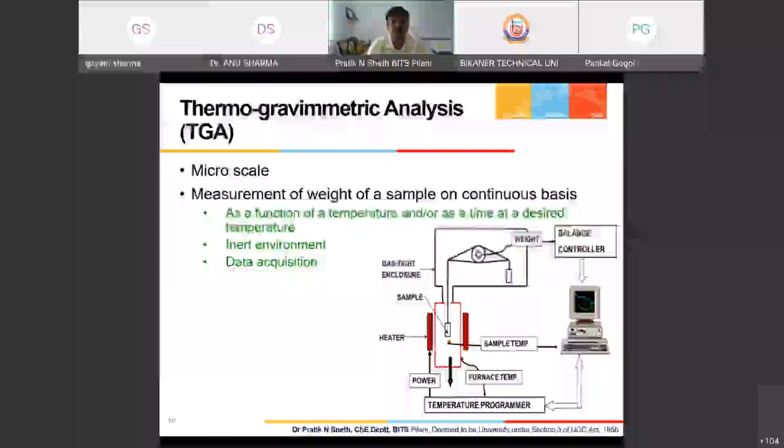So what kind of results do we get out of this? You can have cooling possibility also - if you want to cool down the sample quickly, or heat it and then cool it again, or switch the gas from nitrogen to air to find out how much carbon is remaining and how much ash compound is remaining. That can also be done. So that gives us the idea.

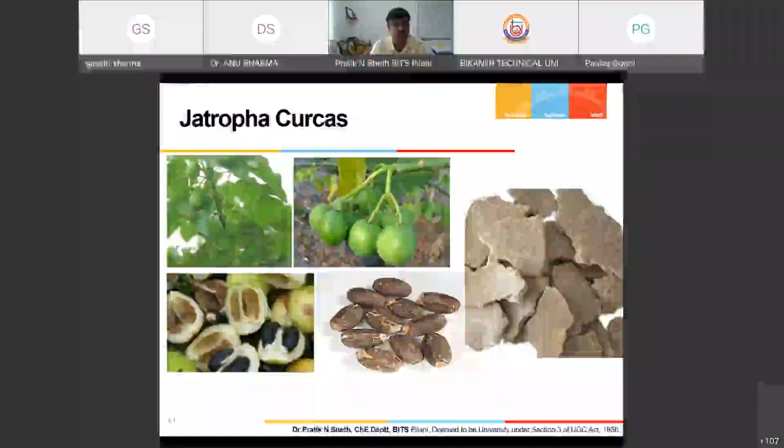This is the Jatropha cake which we used for this analysis, the residue cake. We all know Jatropha is used for biodiesel production, and the oil is extracted. So after extracting the oil, what remains is the oil cake. We used this residue cake as biomass and did pyrolysis, gasification, and those studies. So these results are of that particular biomass.

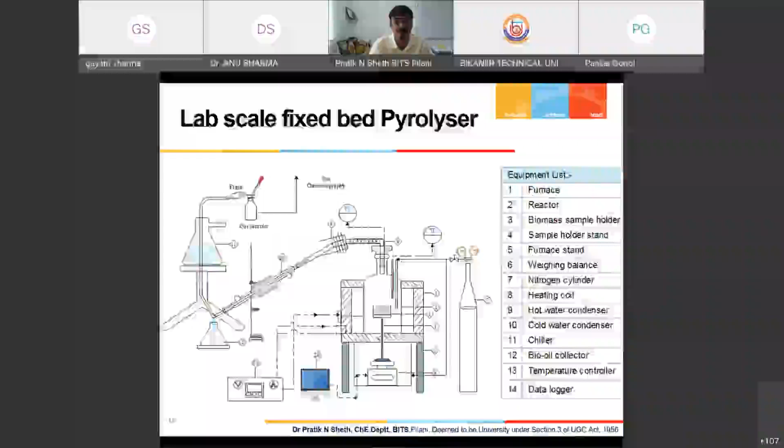So this is the kind of system, and the picture of that, and the furnace, and at the bottom here the sample. Inside it looks something like this, where the upper reactor is resting, and this is the reactor, the furnace at the bottom, and then the secondary cracking here. There are again heating coils which we have put here.

There's one more nitrogen line apart from the bottom. So we get typically this kind of results. We start the temperature at different levels, let's say 25 degrees centigrade, and maintain it to a certain temperature - let's say till 400, or 450, or 500, or 700 - and then we see what yield we are getting.

So if people are trying to use the biochar for nano-adsorbents or for further treatment or chemical upgradation, if you want a higher yield, then you have to play at the lower range. If you're going for a very high range, you may get better porosity or something like that. One can do the morphological analysis also, but the yield is going to decrease for sure.

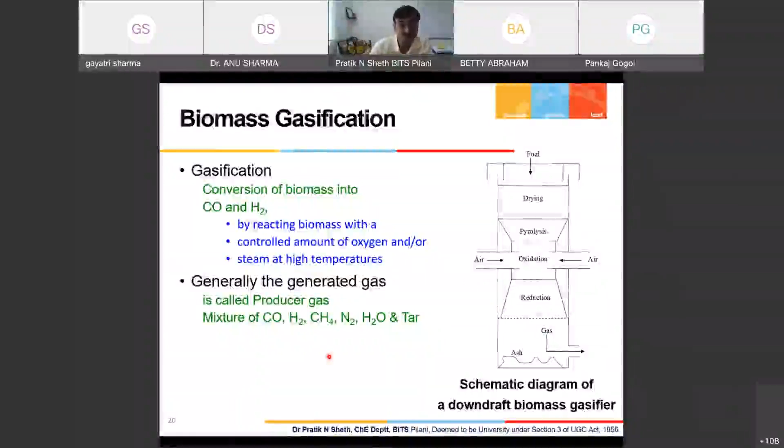So this is the schematic of that. Let's go through a different configuration—updraft gasification. We have a lab scale gasifier with cleaning units, and we conduct regular experiments, modify it, do tar measurements, and modify the setup.

We supply secondary air, and we supply steam—saturated and superheated—at different locations. The air entry mechanisms also change nowadays. We are conducting some novel experiments, and we do tar measurements as well.

At almost 6 atmospheres we can bottle the gas. That's the facility we have here. I think I should have used that while explaining, but I think now it's clear to everyone.

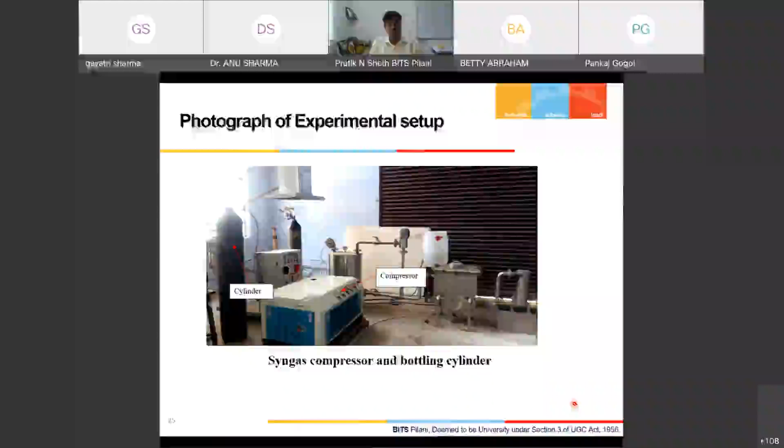So what are the parameters that affect it, and how do we measure performance—how much energy is getting converted, what is the heating value of the gas? There are certain performance evaluation parameters, such as equivalence ratio, lower heating value, gas production rate, and cold gas efficiency. Let us try to understand these one after another quickly.

Equivalence ratio is basically the air to fuel ratio, a controlled amount of air supplied. So if I want to completely burn the fuel, there's a stoichiometric amount of air required, and in comparison to that, how much air I'm supplying. That is the equivalence ratio.

Generally we supply 20 to 35% of that. Equivalence ratio varies from as low as 0.15, 0.16, but you don't get much gas production rate there. If you go for 0.35, that is good, but you should not go beyond that, otherwise it is not recommended. It dilutes the gas a lot because nitrogen content increases as you increase the air.

So the low heating value, based on the content, is higher. There's carbon monoxide, hydrogen, and CH4.

Next is gas production rate, we call it GPR, measured in normal meter cube per kg. We simply do the nitrogen balance, and based on the GC analysis, what nitrogen gas is there, and based on that we estimate how much gas is produced, divide by biomass consumption rate. So per kg of biomass consumption, how much gas is coming, whether it's 3 meter cube, 5 meter cube. That again depends on the equivalence ratio.

Then you have cold gas efficiency: whatever gas is generated, that's the gas production rate, multiplied by low heating value, divided by the total high heating value, the gross calorific value of the biomass in megajoule per kg. Based on that we understand how much energy conversion is happening, how much energy you're able to convert. It is not always 100%, it would be almost 40 to 70%. Sometimes people have reported even higher, we also got as high as 75% for a few experiments.

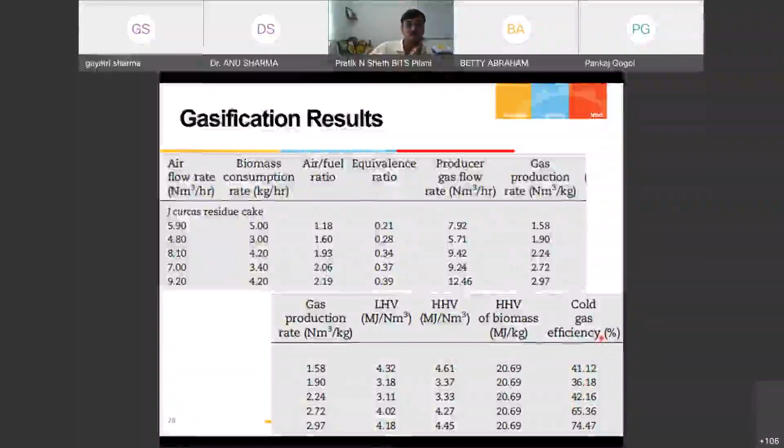You may see it has been varied from 0.21 to 0.4. Producer gas flow rate we got is almost 8 meter cube per hour to almost 12.5, and gas production rate is 1.58 to 3 normal meter cube per kg. The lower heating value is 4.32 to 4.1, approximately 3.5 to 4 megajoule per normal meter cube. The cold gas efficiency is as low as 36 to 75%.

So this equivalence ratio plays a big role. One has to take a little care while operating this.

In our article, those who are very much interested can go through that, and you'll find we have given the data with respect to, for a particular equivalence ratio, how things vary with respect to time, how much hydrogen content is varying, and what is the effect of that.

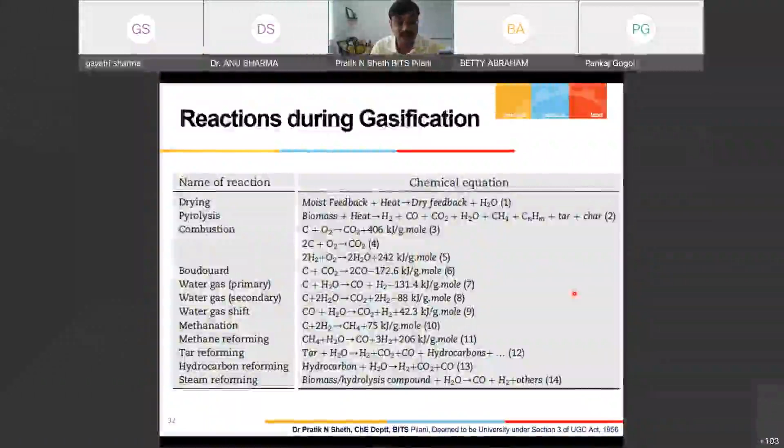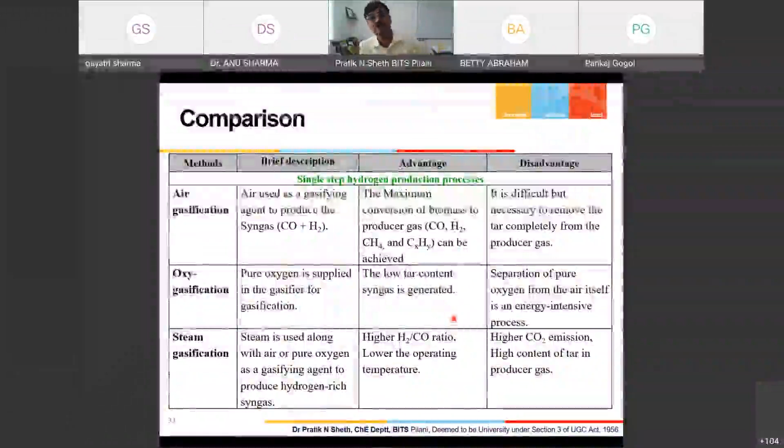The advantage is maximum conversion of biomass we get here, and low tar content when we go for oxy gasification, because it increases the temperature a little bit. But more controlling is required - otherwise the temperature overshoots and creates NOx formation, or sometimes material requirements need to be looked at from the life-of-equipment point of view.

If I'm going for steam gasification to get a higher H2 to CO ratio, what happens is, since it's an endothermic reaction, the reduction zone temperature may decrease, and it's possible that at a certain H2 to CO ratio performance decreases. But there is some optimum H2 by CO ratio one can target to get a really good amount of hydrogen.

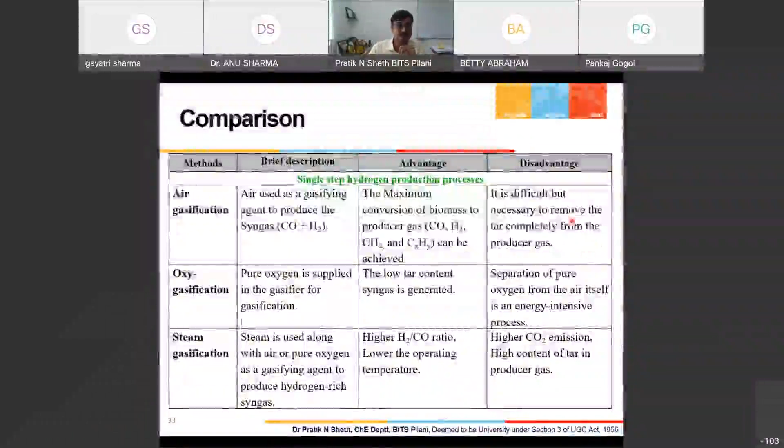The disadvantage is tar generation is difficult to remove and will be more. Here there's separation of pure oxygen from air, which is an energy-intensive and costlier process. For steam, higher CO2 emission would be there, but that's okay - though again a high content of tar can also result if going for steam gasification. This is the comparison of this.

It's a combined effect because air is supplied, it creates combustion. You don't have any other energy supply. It is only through combustion that energy supply is there, and that energy is getting utilized by drying, pyrolysis and reduction.

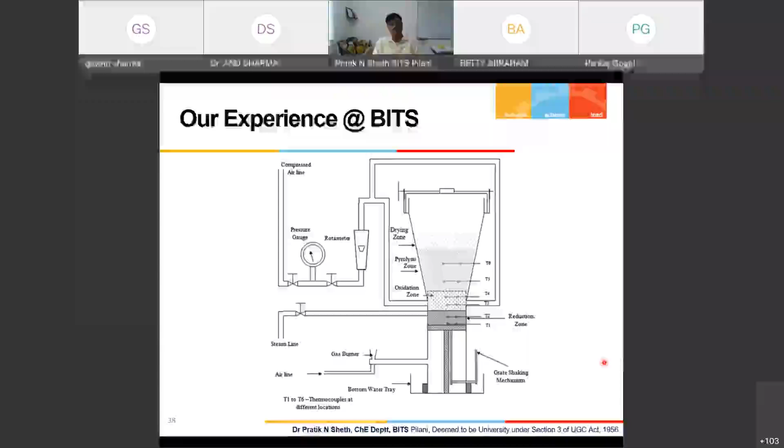What we have done, based on our experience, is insert the steam directly into the reduction zone of the gasifier. We have a steam generator there, and recently procured a steam superheater also. This was based on our experience, as reported in an article we published in 2016, about what happens when going for pure steam gasification.

May I interrupt you? Yes, please. There is a question in the chat box: how is hydrogen separated from a mixture of gases, or is it used as such, as a mixture?

Okay, fine. See, when I am going for air gasification, nitrogen is there. If I'm going for oxy-gasification, I'm getting hydrogen-rich gas. So first of all, we need to do a catalytic upgradation of hydrogen, followed by pressure swing adsorption. We can use that, or some membrane separations. But as of now, pressure swing adsorption is preferred, and through it you can remove the CO2 and CO, if any.

So what you get from gasification? Yes, it's a mixture, not pure hydrogen. Am I answering your question?

Go ahead, sir. Okay, fine. I was addressing the steam. So the temperature plays a crucial role.

I was telling that when we added the steam, and the steam was saturated steam, it takes up the heat, because the operation occurs at around 700 to 800 degrees centigrade. If you insert the steam at 150 or 160 degrees at 7 bar or 6 bar, then you don't get that enhancement.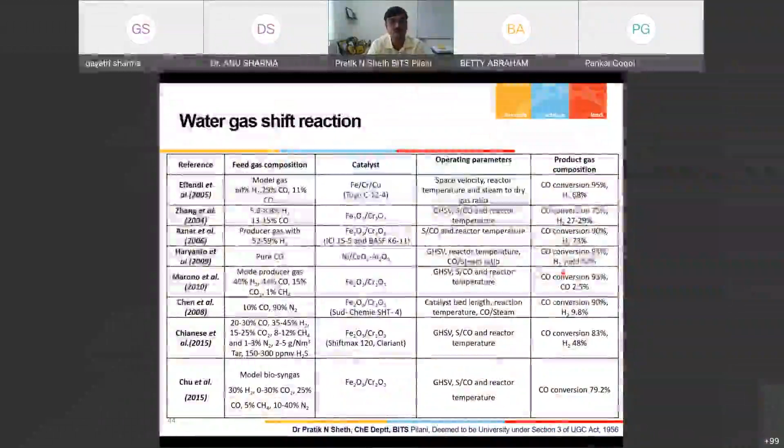In our study, we used the HTS catalyst here, along with the residue cake which I have shown earlier, and two other biomasses we used: biomass pellets from two different companies, Live Green and EcoShakti.

The catalyst configuration is iron chromium, 92% weight by weight and 8% weight by weight, with a size of 6x6, cylindrical tablet-like in nature. The temperature range corresponds to Shiftmax 120, which is the trade name, basically the high temperature shift catalyst.

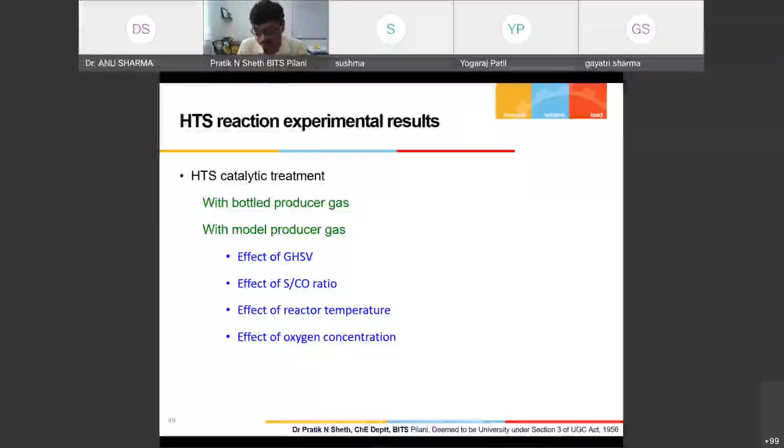And the CO utilization, you see it is decreasing a little bit. CO2 is increasing a little bit, and H2 as well. So we were literally a little panicked, thinking, what is happening? We varied all the different GHSV, steam to CO ratio.

What has to be done is, this catalyst is an Fe2O3 and Cr2O3 mixture, with 92% Fe2O3. We did SEM analysis also, XRD also, and made sure the temperature is the right value. So we found the catalyst itself was not the problem. But when we went through the reduction procedure, the active part is Fe3O4, the magnetite phase.

What happens, particularly for biomass gasification or pyrolysis, is that if the moisture content is very high, modeling allows 50% or 70% moisture, but in real life you can't really burn it unless it is less than 15% or 20%. Only then will it burn effectively in the combustion zone and you get a good amount of gases.

Otherwise, it will be difficult to operate. So for biomass with high moisture content, you can increase its pressure and temperature above critical values, and if you maintain the supercritical condition, water itself acts as a catalyst there, producing faster and more syngas.

High moisture content biomass can be utilized, though high energy input would be required for that. But you get hydrogen syngas there. That is one technology called supercritical water gasification.

Then you can have in situ catalysis. People have done in situ catalytic pyrolysis, where the biomass is heated in absence of oxygen and you put a certain amount of catalyst into the pyrolysis unit itself. But the catalyst is prone to deactivate faster due to formation of a carbon layer over it, and it doesn't go well.

A third idea is bio-oil reforming, a standard procedure where bio-oil gets reformed with a catalyst into hydrogen fuel. Naphtha reforming is a very standard process; people have used it earlier for hydrogen production, and it can also be used for this.

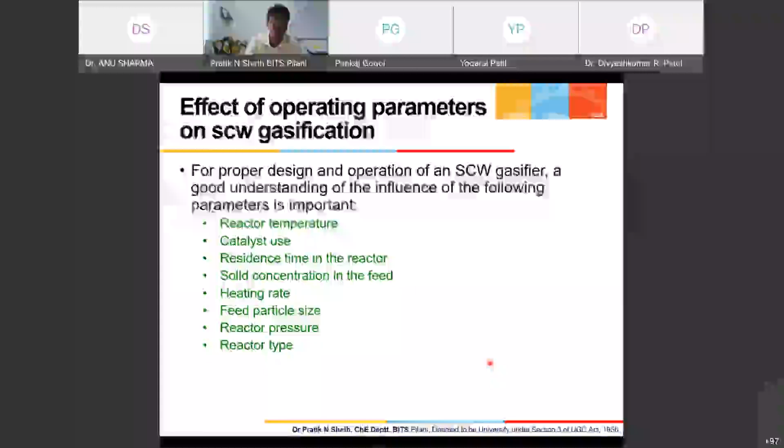So what are the different effects on that? These include reactor temperature, catalyst, residence time, solid concentration in the feed, the heating rate, and the feed particle size.

In general, at laboratory scale, many studies exist. We carried out a literature survey and found different kinds of biomass and reactors people have used, along with different catalysts, majorly ruthenium-based, or ruthenium with alumina-based catalysts, or different combinations.

Various operating ranges are very high pressure, and there's a range of hydrogen production achieved, along with various observations. One can find more details of these things in the article, including what exactly was studied by different people.

Different catalysts have been used, and there are three principal types people used: alkali, metal, and carbon based. A good amount of hydrogen yield has been reported.

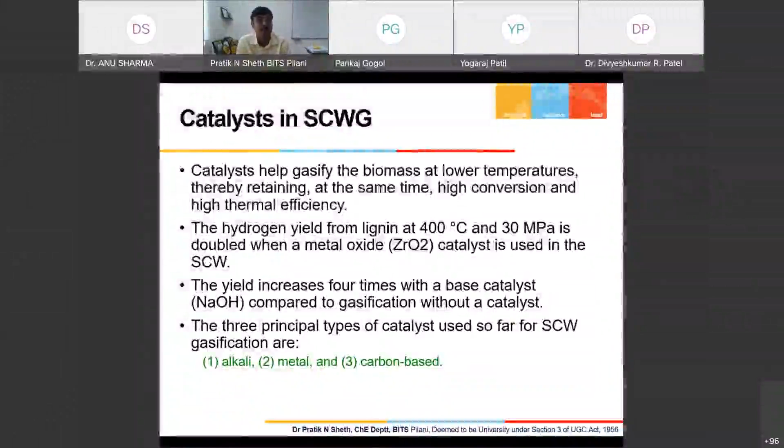The next topic covers various other studies, their advantages and disadvantages. When using a liquid-based catalyst like NaOH or KOH, where the catalysts are alkali based, it is difficult to recover from the solution.

Once it is used and charcoal is generated, it is gone into the system, and you need to prepare a new system. But if you go for a metal oxide kind of catalyst, it can be very easily recovered, regenerated, and used again. That is the advantage of metal oxide based catalysts, which is very obvious and basic in nature, but people have reported it.

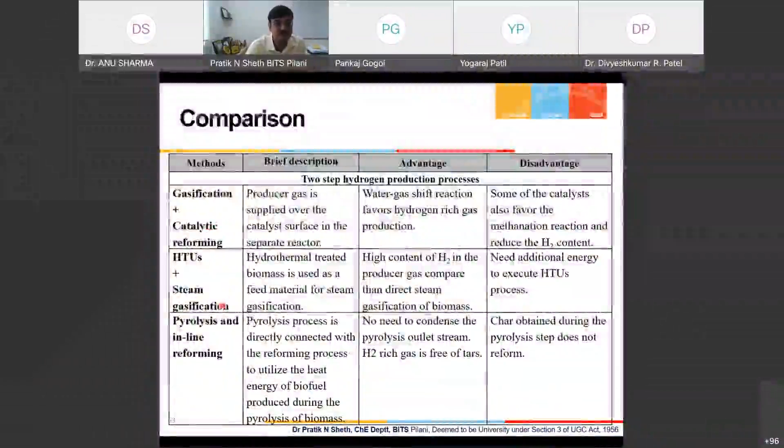The two-step process is one in which people have used gasification plus catalytic process, which I already explained in detail. Then there's HTU plus steam gasification, where hydrothermal upgradation and steam gasification are both clubbed together. Or pyrolysis and inline reforming, where whatever vapors are generated get directly reformed in line.

So, a kind of process it is there. The next is the HTU followed by, basically what happens is direct conversion, and various studies have been carried out. It improves the quality of the biomass, and the temperature already mentioned is up to 374 degrees. This allows direct conversion of high moisture content biomass, and few researchers use this technology.

There is one more thing, hydrothermal carbonization, HTC, also is there. So in HTC, the major target is...

Sorry to interrupt you, sir, you are not audible. Am I audible now? Hello? Am I audible? Oh yes, audible. Fine, thank you.

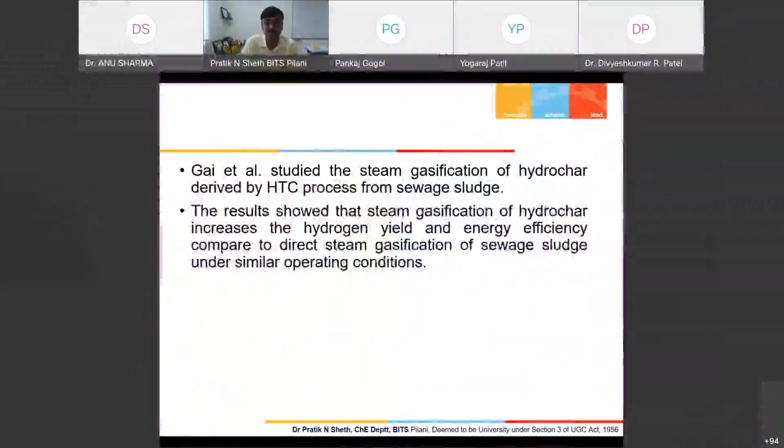So what are the important parameters here? There is particle size, operating temperature, and residence time. The smaller the particle size, the better, but that increases the grinding cost. The higher the operating temperature, the better, as the percentage yield of hydrogen is more at higher temperature, which is already established in gasification studies as well. Residence time has a nominal impact, it has been found.

What happens is that it significantly influences the tar formation and product distribution. If you have a higher residence time, it further cracks your volatiles sometimes, leading to secondary cracking which produces more permanent gases. So that is what one can infer from that.

The next topic, pyrolysis and inline reforming, is already covered. At this point I'm almost at the end of my presentation. There is one more topic, tar cracking, but if time allows I can go ahead, otherwise I'll stop here.

Maybe we have a few more minutes, or we would like to take up more questions. Shall I continue? Let me check the messages. Yes sir, am I audible, sir?

Yeah, fine, okay. Yes sir, there is one question in the chat box, let me have a look at it. What do you mean by bottled producer gas? That I already answered, yeah, that I answered just a few minutes ago.

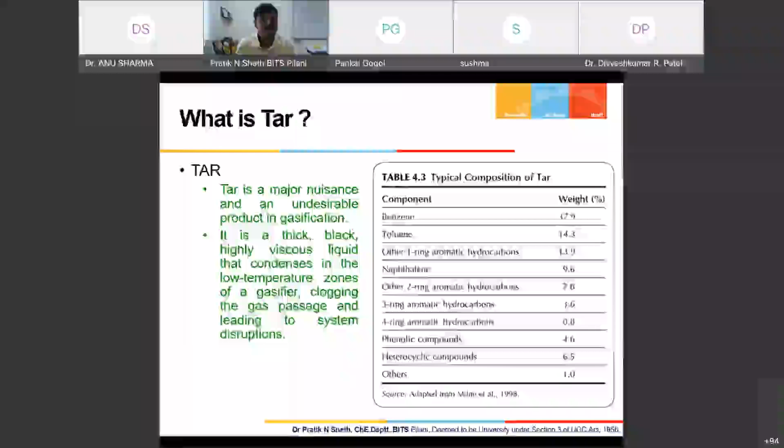In general, if it is lower than 5 to 10 milligrams per normal meter cube, you can use that gas even in IC engines. The compressor and other things will not create an issue, so basically cleaning would not be required. If I'm simply firing or burning it, then tar is not a problem, but if I'm going for hydrogen production, then why should I lose the energy into that? So that's what tar is.

So tar is a major nuisance and undesirable product in gasification. As you can see, typical tar composition is mostly hydrocarbons, mostly aromatic in nature, like benzene, toluene, then naphthalene, 3-4 ring compounds, phenolic compounds, and heterocyclic compounds.

It's a thick, black, highly viscous liquid that condenses into the low temperature zones in the gasifier, clogging the gas passage and leading to system disruptions. When we conduct the experiments, we sometimes see that the line gets choked, or gas rate is not coming, or pressure is getting built up in the gasifier.

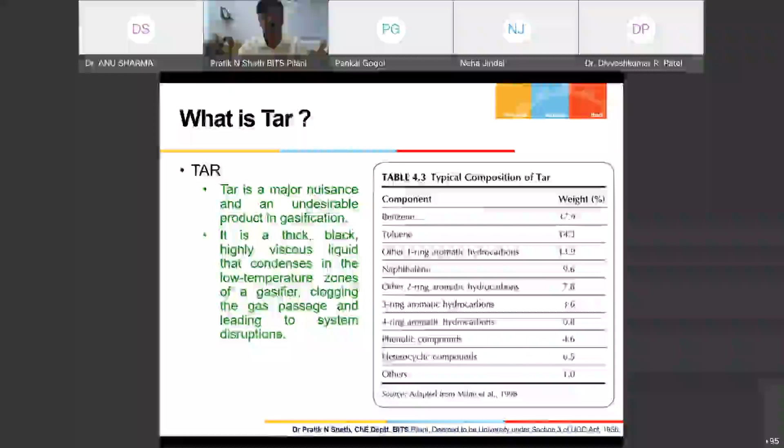So what has to be done? We need to clear those lines either through chemical cleaning or mechanical cleaning, we need to do it, the setup lines. Although the lines are 1 inch lines all around, still sometimes they get clogged because of the tar. So temperature needs to be maintained, and uniform air supply has to be there. That is very important.

So what exactly can catalytic or thermal cracking do? We conducted some experiments with that also. What we did is, below the reduction zone, we put a CaO catalyst, basically calcium oxide, and then we see whether tar is reduced or not. Certain experiments we conducted with that as well.

Reforming, thermal cracking, and steam cracking are the 3 major reactions, and they convert tar into smaller and lighter hydrocarbons, which is preferable. Of course, a certain amount of coke would also be generated because the tarry liquid is very heavy, having C, H and O. Whatever the volatile fraction is there will go off, but the remaining part is nothing but coke, or certain lumps of coke would be formed because of that.

So you can have 2 different kinds of approaches: thermal cracking and steam cracking. Thermal cracking can be done where you go for a uniform temperature. We have recently submitted a manuscript on this; it is not yet published, so I'll just reveal a small amount of what we have done. Let me just get a pen out.

In the combustion zone, particularly, air is entering from 2 locations. So what we recently did is prepare a small ring kind of thing inside, and we try to maintain the same velocity, with multiple entries, like 20 entries we created here. We are doing this kind of study so that whatever pyrolysis zone is created here, when it passes through, we make sure the uniform temperature is almost 800 to 900 degrees centigrade for that crack.

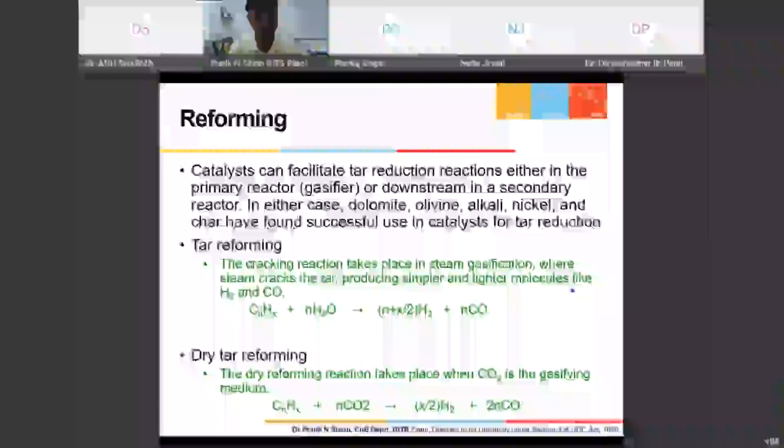In reforming, the catalyst can facilitate tar reduction either primarily or downstream in a secondary reactor. There are various catalysts like dolomite, olivine, alkali, nickel, and char itself has been found successful for tar reduction. These are the two reactions we have shown for steam reforming and CO2 reforming. There is also dry reforming, as we call it.

So with this, I'm ending today's lecture, and I'm very much thankful to my PhD students who did all this work. There are two students who recently completed in '18 and '19: Tapas Kumar Patra and Rajiv Sharma. Tapas is working right now at IISc Bangalore as a postdoc, and Rajiv is with Amity University.

Three students are currently working: Bhupendra Pandey, Pratik Sharma, and Bhavya. We have collaborated with NCCBM, the National Council of Cement and Building Materials, Ballabgarh. And ME students Itishri, Haman, Parth, Subhadeep, and Namrata, and recently Pavan Nayak is doing work as well.

Certain analytical facilities, apart from what I have shown, include Rotavapor, TGA, DSC, HPLC - all these setups. Apart from that, these are department facilities, and we have a central analytical facility where we have elemental analyzers, PyGCMS, GCMS, LCMS, ICP-OES, NMR - all these things are there where we can book slots and do it.